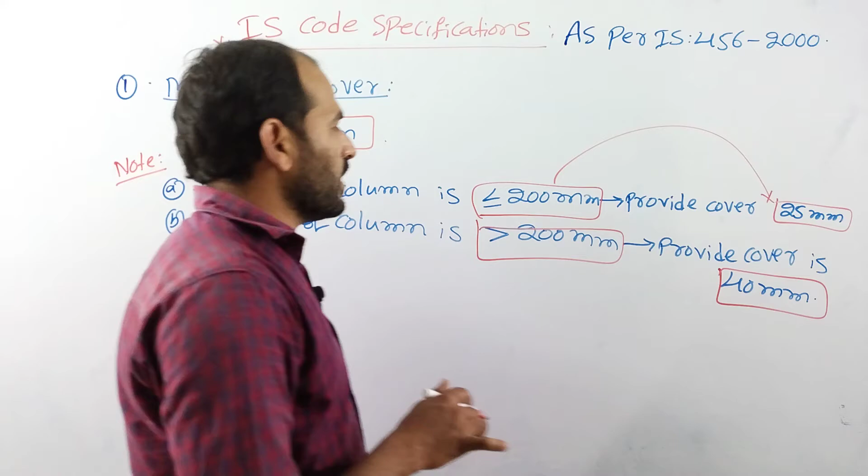Next one is minimum steel. So IS code specification, minimum cover is 40 mm for columns. So next one is minimum steel.

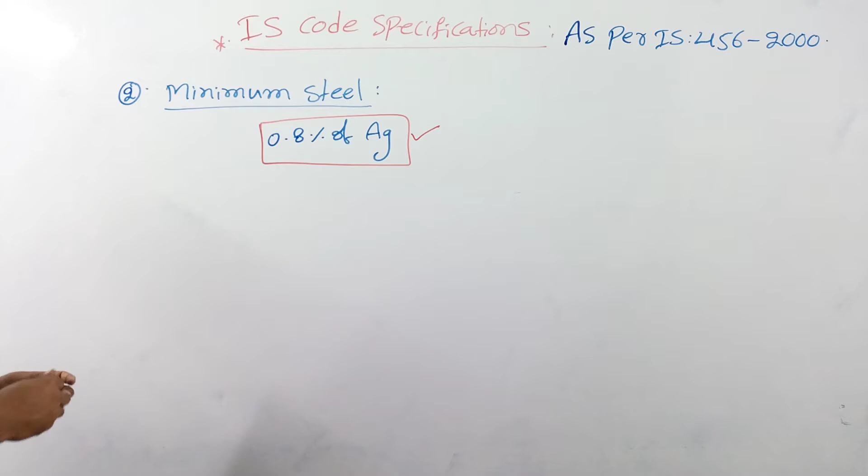So next one is maximum steel. This maximum steel is provided, that is should not be more than 6% of gross cross sectional area.

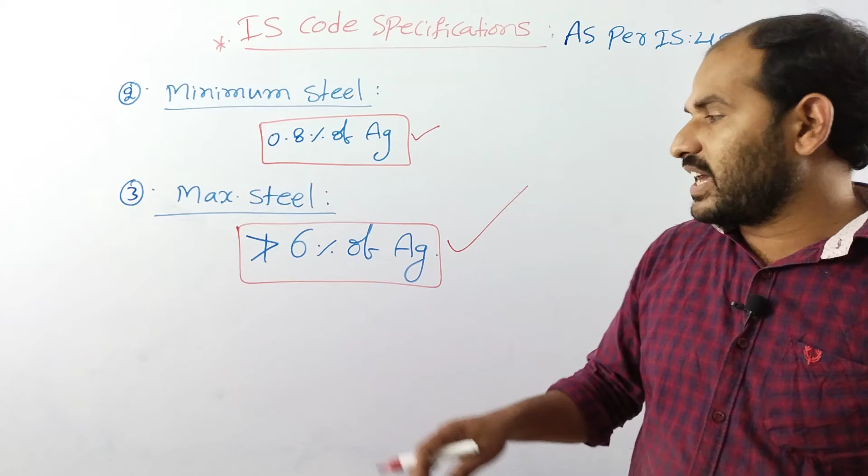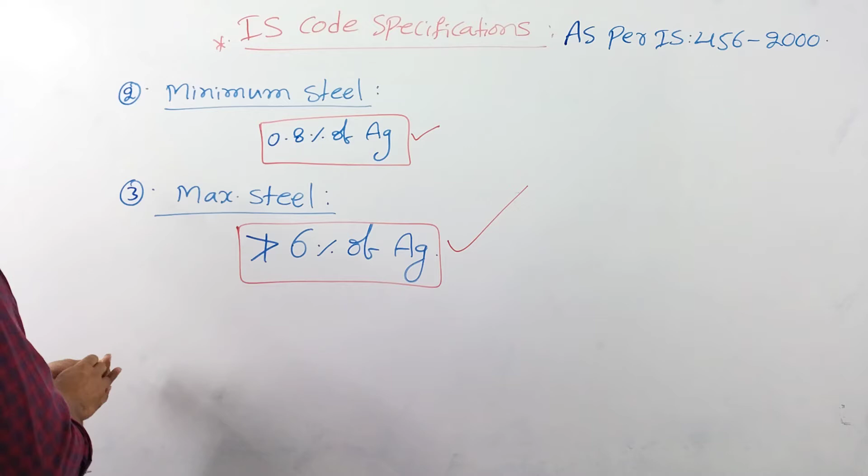So this is maximum steel. And minimum diameter of the bar enta. Next, fourth one is minimum diameter of the bar.

Minimum diameter of the bar, minimum diameter of the bar. Minimum diameter of the bar is 12 mm is the minimum diameter of the bar provided in the column is 12 mm.

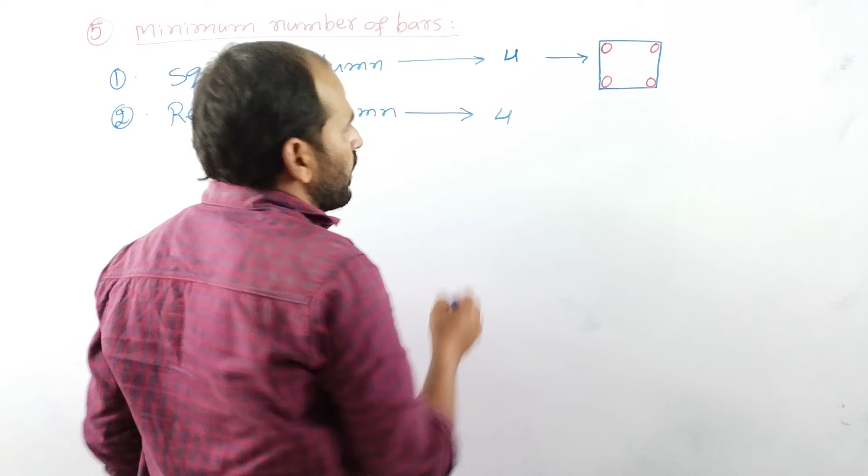Second one is rectangular. For rectangular column minimum number of bars how much? 4 minimum number of bars in a rectangular column. Rectangular ila kuda untundi kada. Minimum number of bars here 1 and 2, 3 and 4. Here also same, 1 2 3 4. So minimum number of bars for rectangular column is 4.

Next one is for circular column.

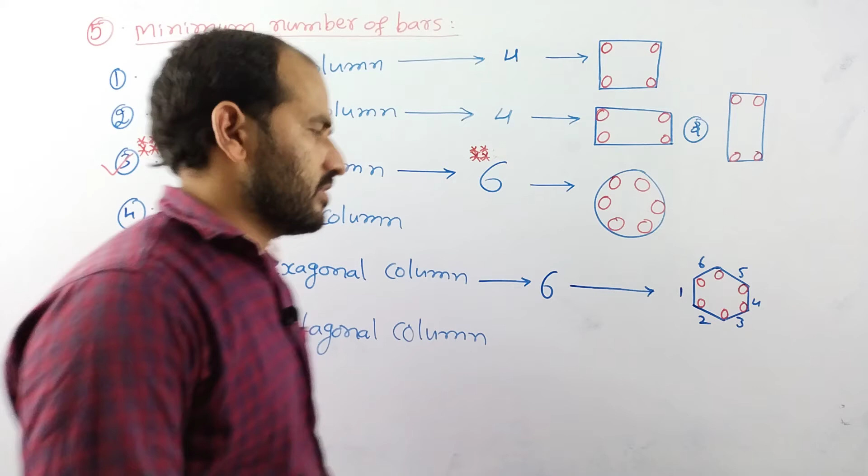How? We will see now.

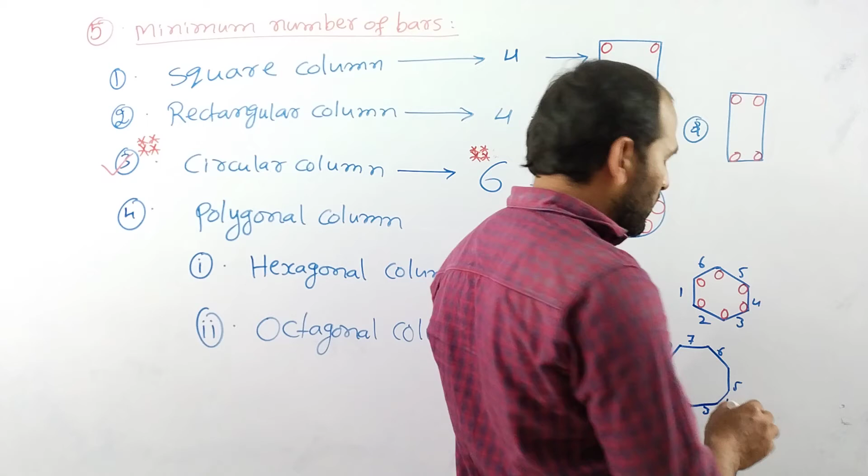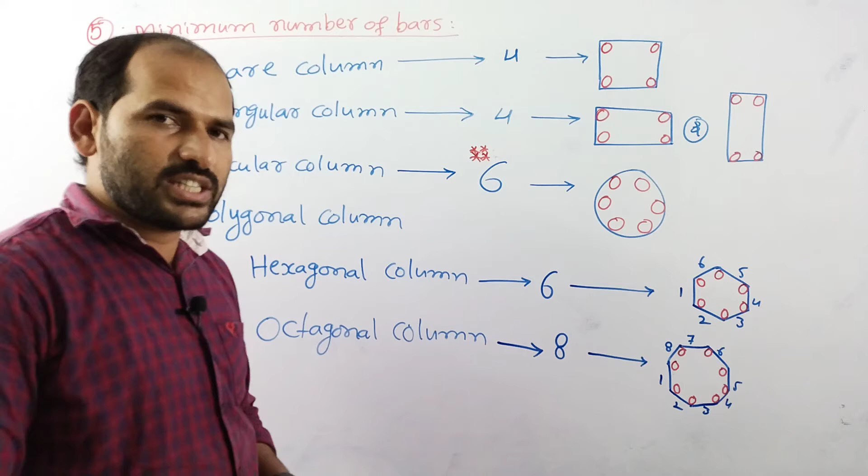So octagonal, 1 side, 2, this is 3, this is 4, this is 5, this is 6 and this is 7, this is 8. So octagonal number of sides is 8 and minimum number of bars is 1 2 3 4 5 6 7 8. So 8 bars, minimum number of bars in octagonal column is 8. Sides also 8. Minimum number of bars in hexagonal column, 6 sides, 6 minimum number of bars. So these are the minimum number of bars.

Next one is minimum eccentricity, enta provide cheyali.

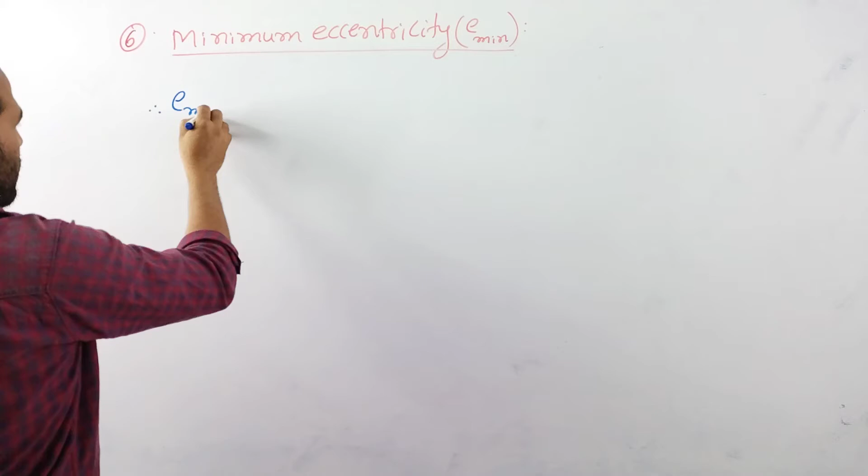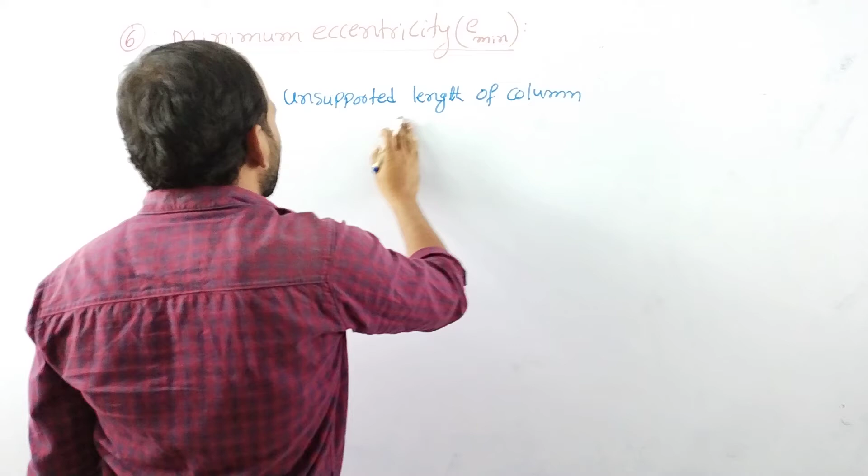Minimum eccentricity, E minimum. So minimum eccentricity E minimum is equal to unsupported length of the column, unsupported length of a column.

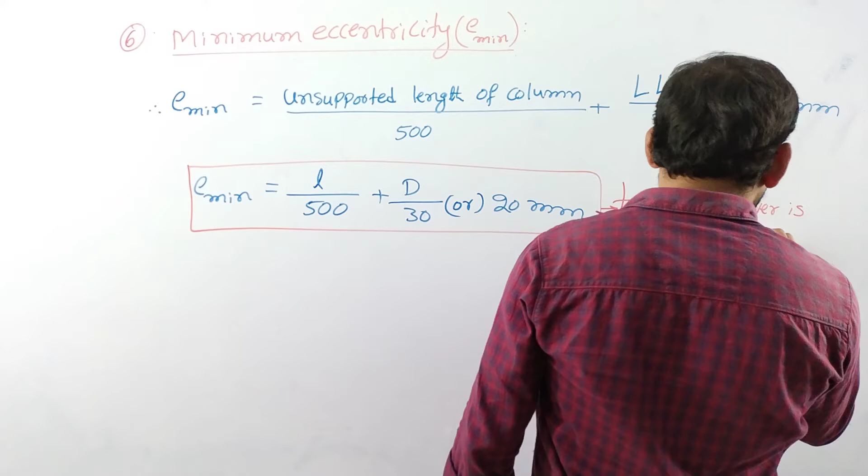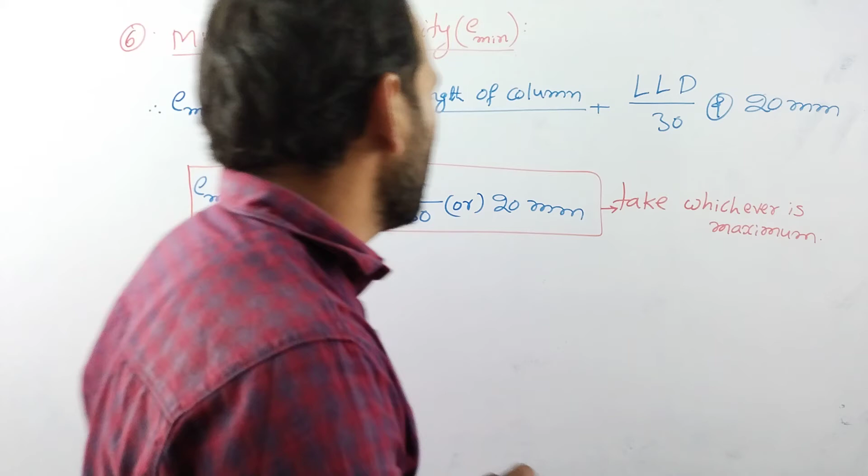So unsupported length of the column, that is L upon 500, plus least lateral dimension upon 30, or 20 mm, whichever is maximum. So E minimum is equal to unsupported length of the column upon 500 plus least lateral dimension of the column upon 30, or 20 mm, whichever is maximum. So take whichever is maximum.

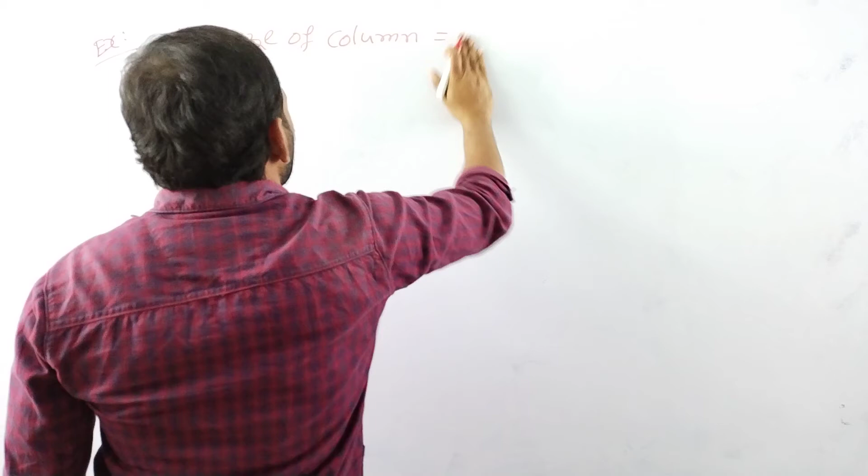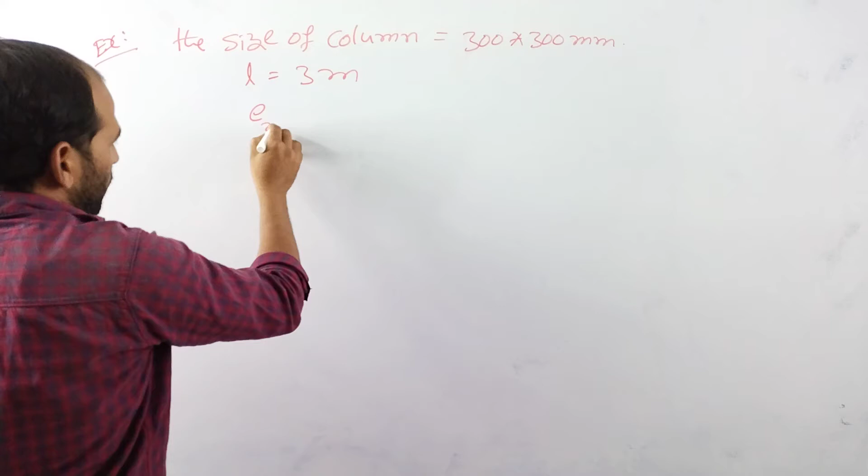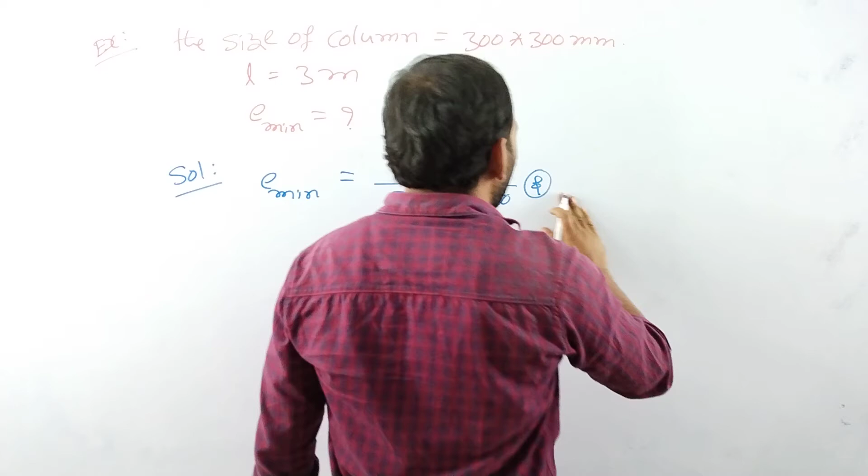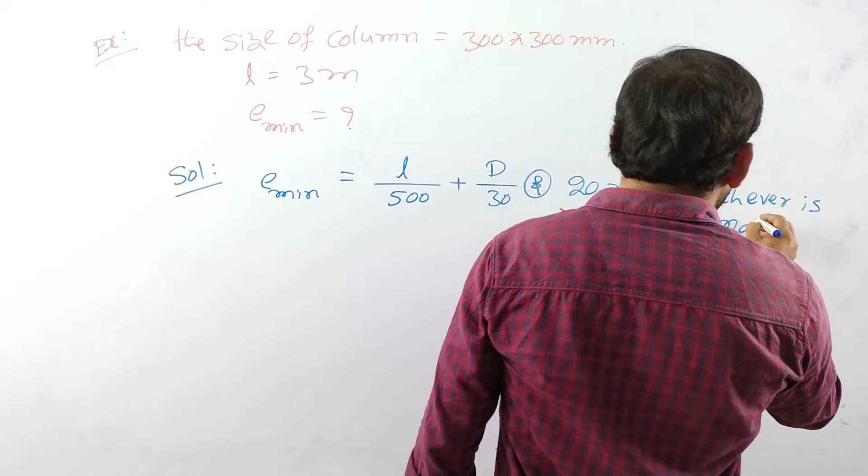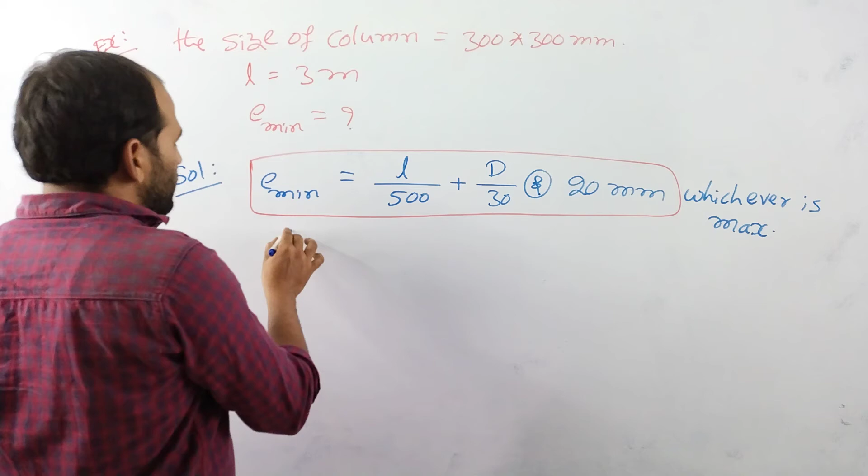Alright, so for this question the solution is: E minimum is equal to effective length of the column, that is unsupported length of the column, upon 500, plus least lateral dimension upon 30, or 20 mm, whichever is maximum. This is the formula.

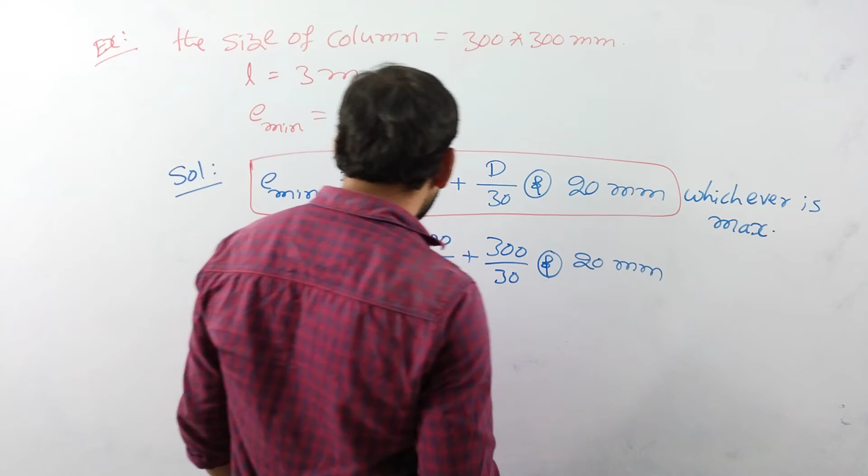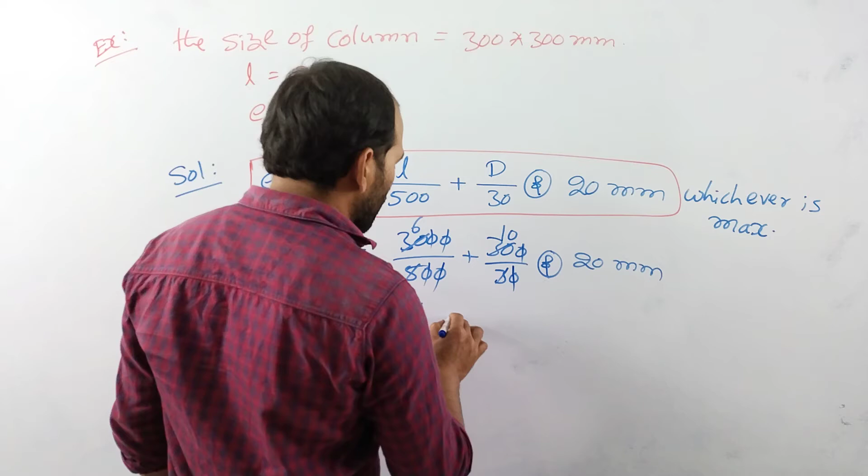So in this formula, substitute the values: L is 3 meters, that is 3000 mm, upon 500, plus least lateral dimension is 300 upon 30, or 20 mm. Here two zeros cancel giving 6, and here this gives 10. So 6 plus 10 is 16 mm, or 20 mm.

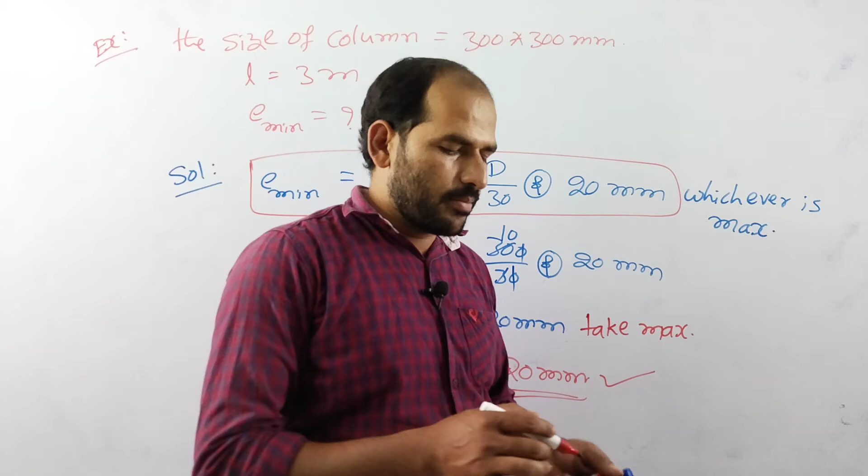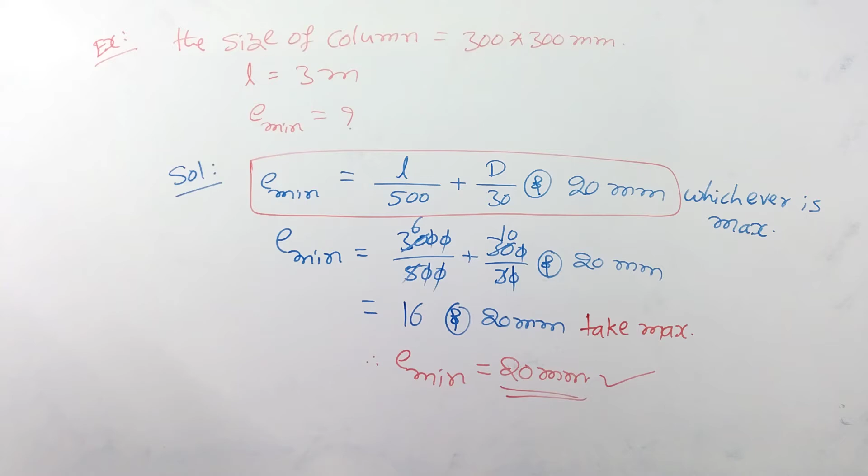But here we take the maximum value among these. Therefore, E minimum is equal to 20 mm. So 20 mm is the minimum eccentricity of the column. This is about the size of the column and the minimum eccentricity. The minimum eccentricity of the column is 20 mm.

Alright, so next one is load carrying capacity of column. Next our discussion is load carrying capacity of a column. If you take a tied column, for a tied column, the load resisting capacity, load carrying capacity.

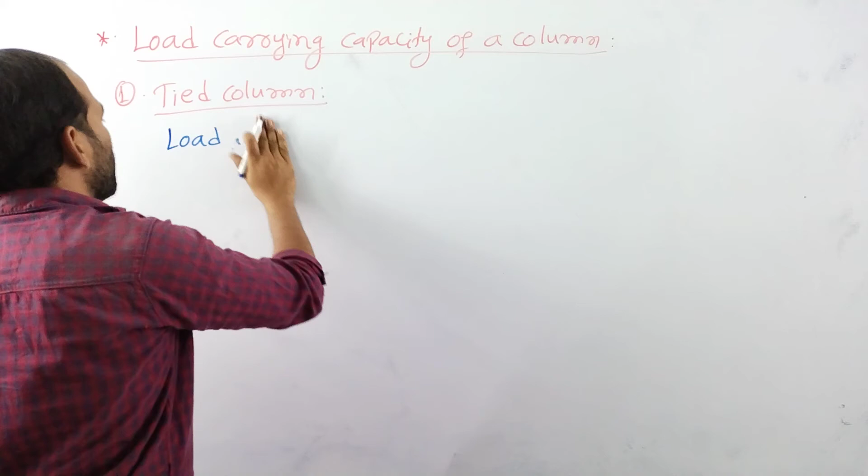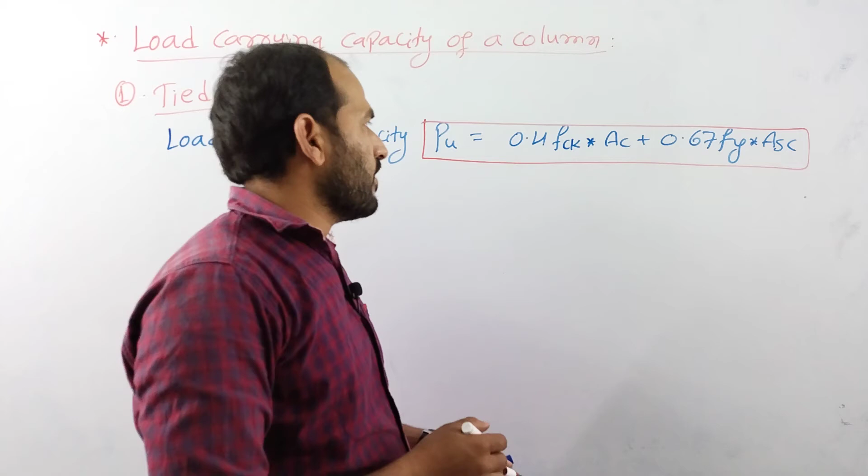So load carrying capacity of the column, that is Pu, is equal to 0.4 times FCK into AC plus 0.67 times Fy into ASC. This is the load carrying capacity of a tied column.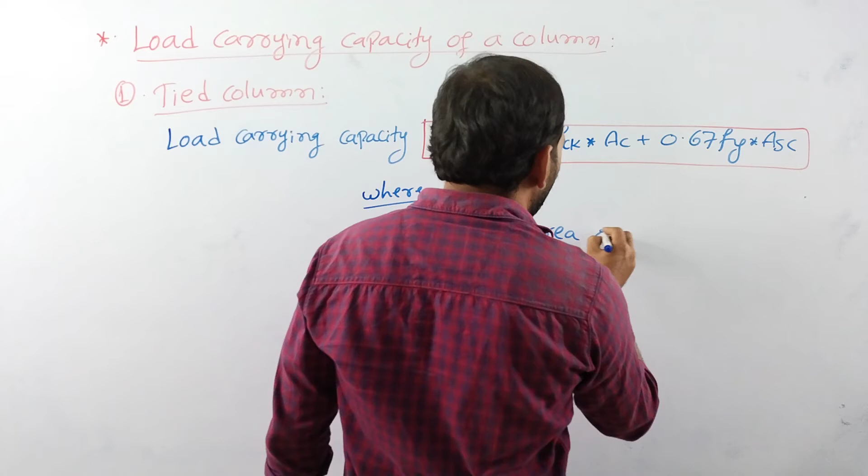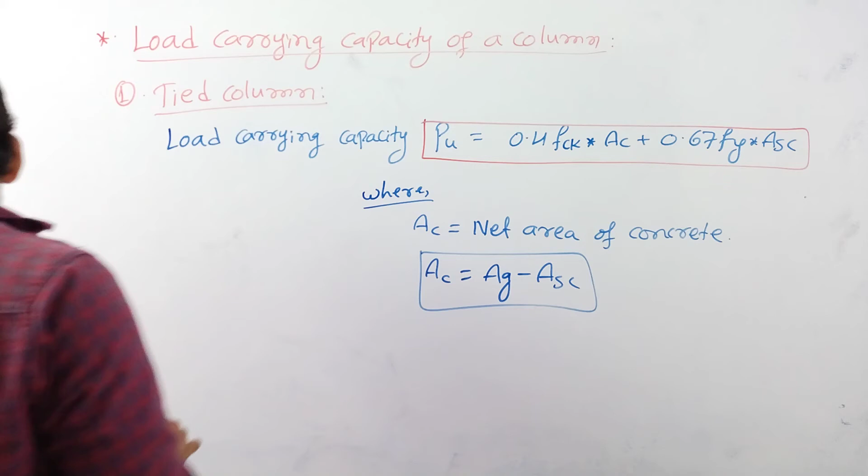So where AC is equal to net area of concrete, and AC is equal to AG minus ASC, where AG is equal to gross cross sectional area of column.

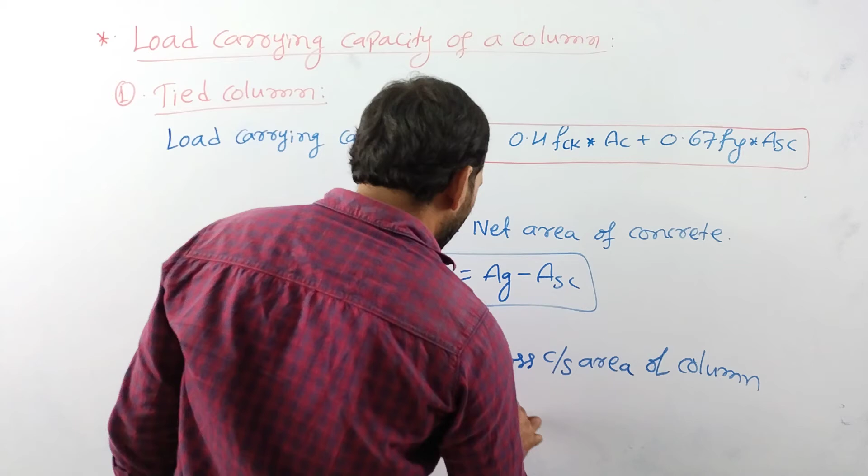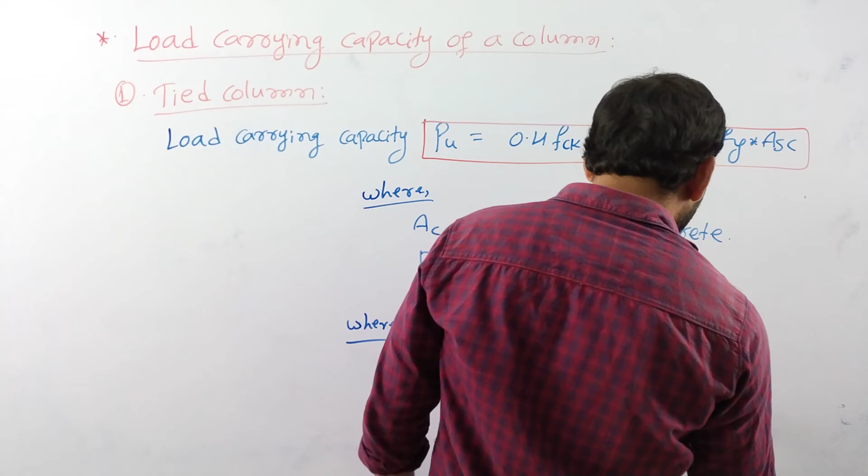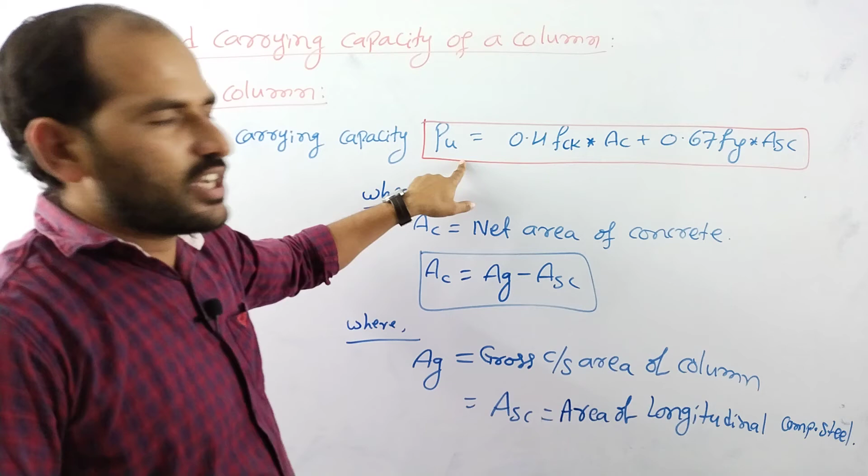And ASC is equal to area of longitudinal compression steel. So load carrying capacity of a column, if you consider the tied column, Pu is equal to 0.4 times FCK into AC plus 0.67 times Fy into ASC.

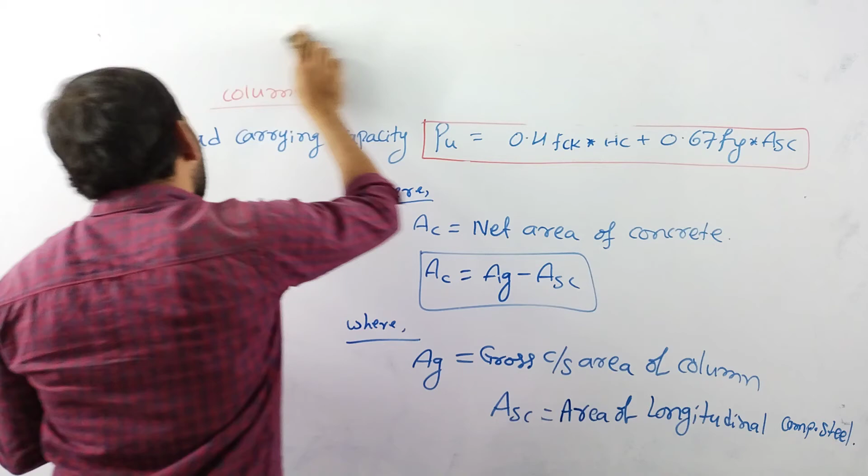Remember, this is the load carrying capacity of a column if you consider it as a tied column. Alright, so next one is a helically reinforced column. This was the formula for a tied column, but what about the load carrying capacity of a helically reinforced column? How do we find that out?

What is the formula for determination of load carrying capacity of a helically reinforced column? Right, so the second one is load carrying capacity of a helically reinforced or spirally reinforced column.

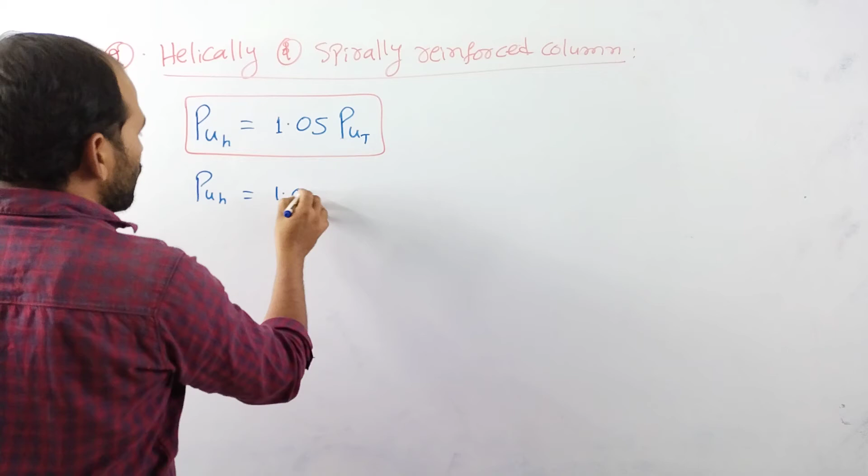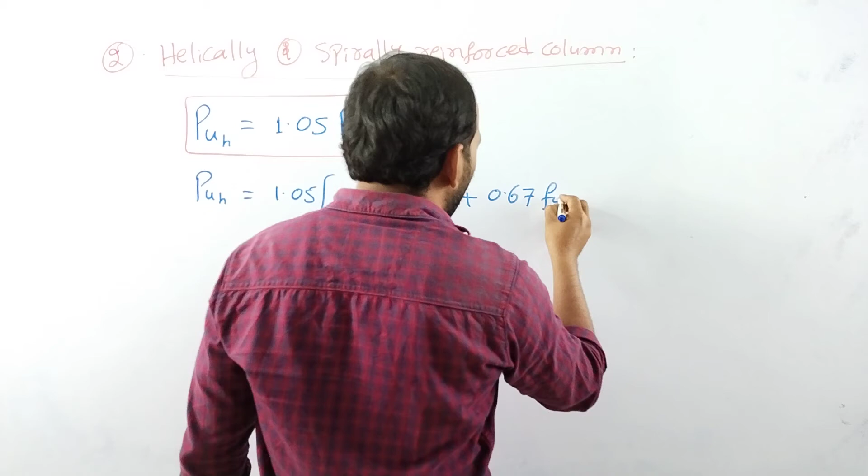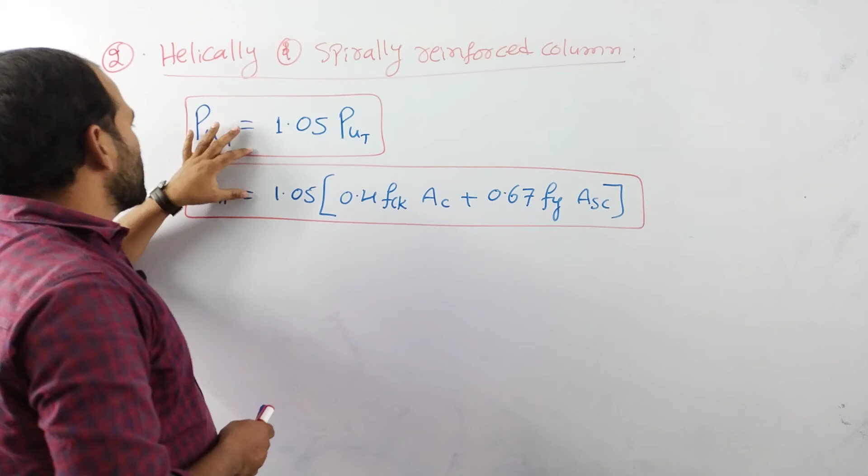So PUH is equal to 1.05 times of 0.4 times of FCK into AC plus 0.67 times of FY ASC. This is the load carrying capacity of a helically reinforced column or spiral column.

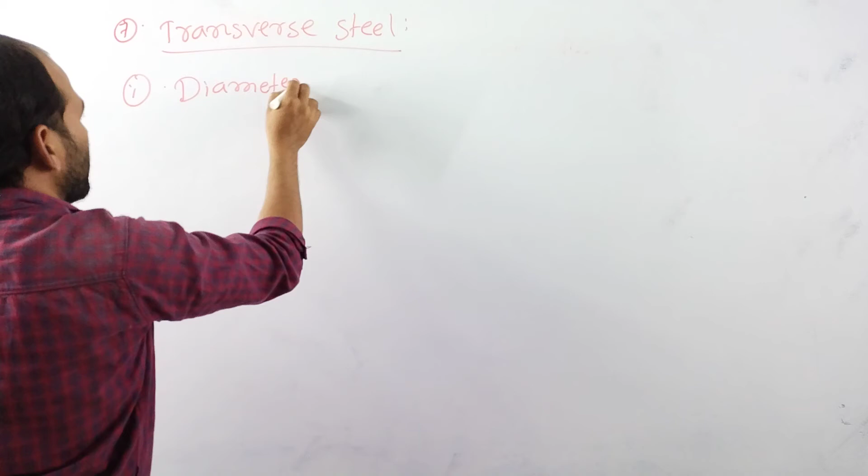Next, for the transverse steel based on IS 456-2000, we need to determine the diameter and pitch of the transverse steel. If you take a diameter, what is the diameter of this transverse steel?

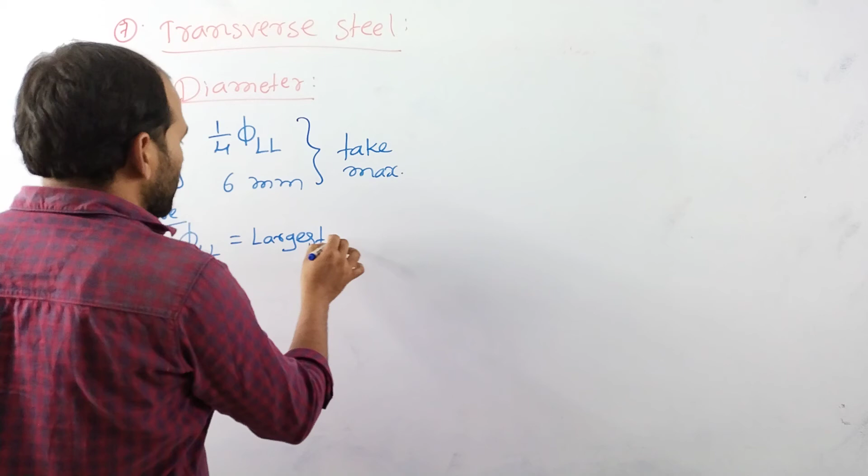Number one option is 1/4 times of the diameter of the largest longitudinal bar, and the second option is 6 mm. Take whichever is maximum among these two, where phi LL is equal to the diameter of the largest longitudinal bar.

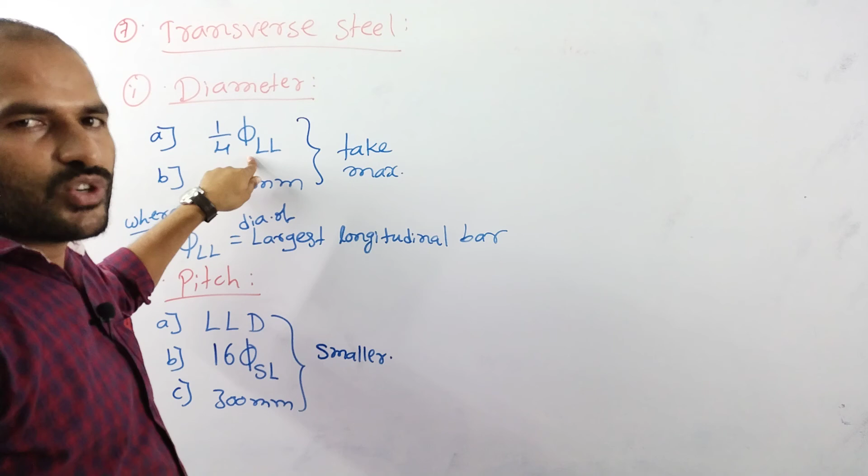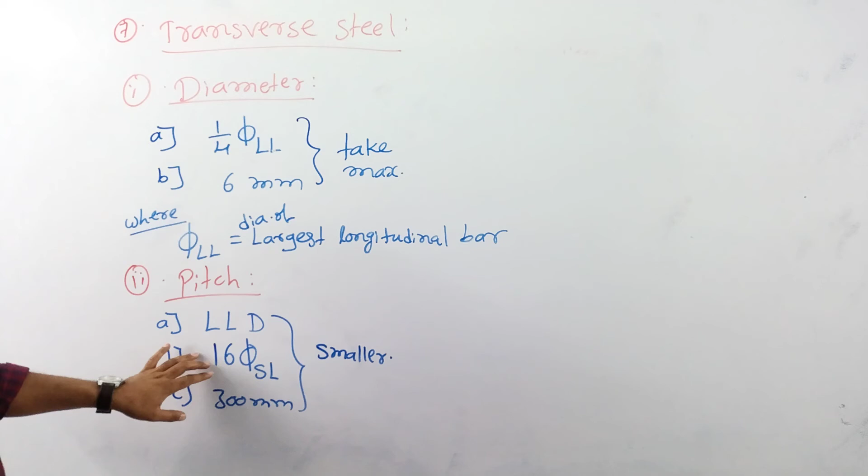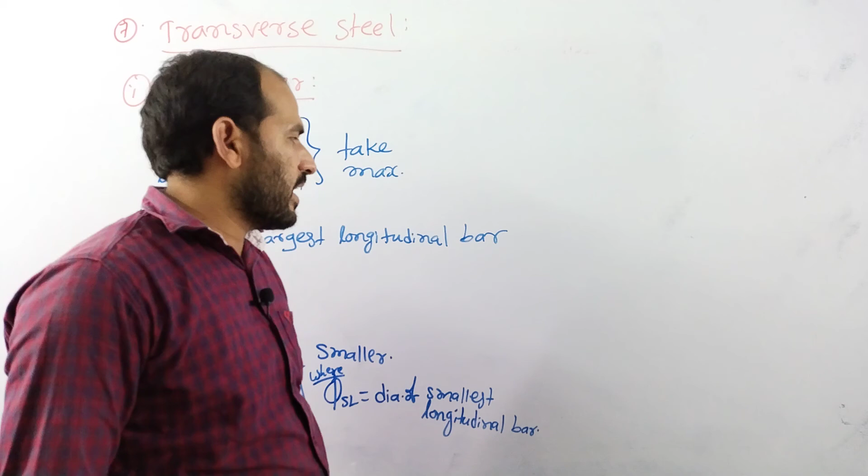So take whichever is smaller, where phi SL is equal to diameter of smallest longitudinal bar. So this is in the transverse steel, the diameter and the pitch specifications.

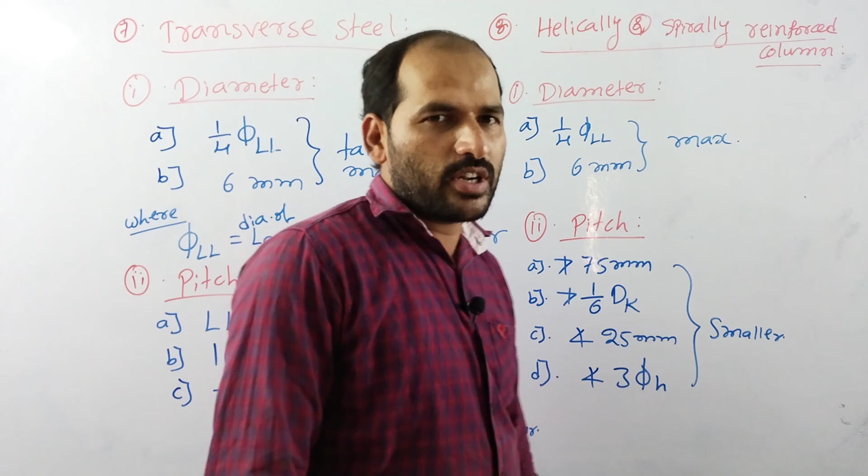If you take a helically reinforced column or spiral column, the diameter of the transverse steel is the same as before. Here also take 1/4 times of diameter of largest longitudinal bar or 6 mm, take whichever is maximum.

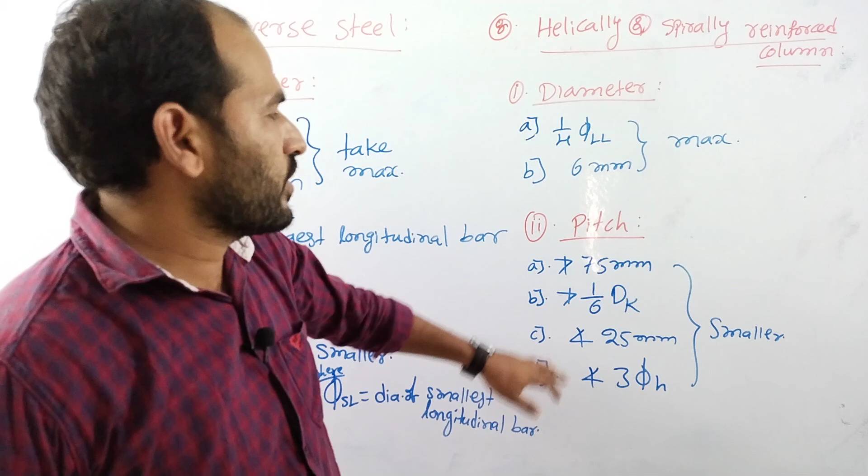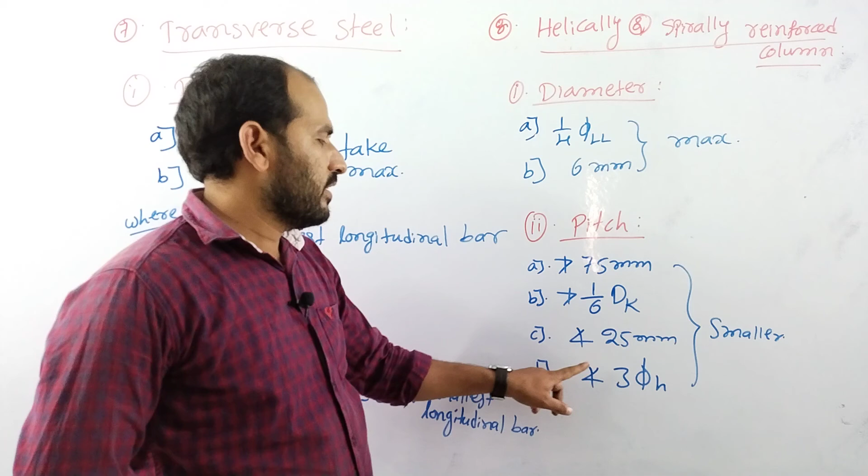If you take the pitch in a helically reinforced column, it should not be more than 75 mm, or not more than 1/6 times the diameter of the core, or not less than 25 mm, or not less than 3 times the diameter of the helical reinforcement. Among these 4 values, take the smallest value as the pitch.

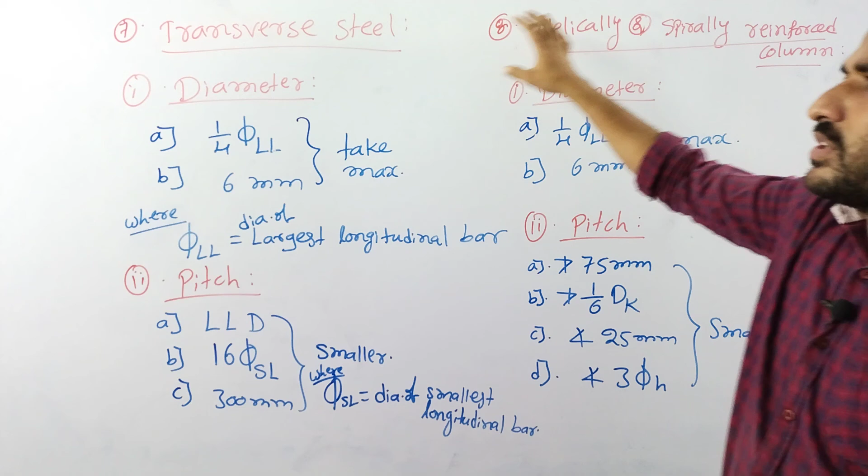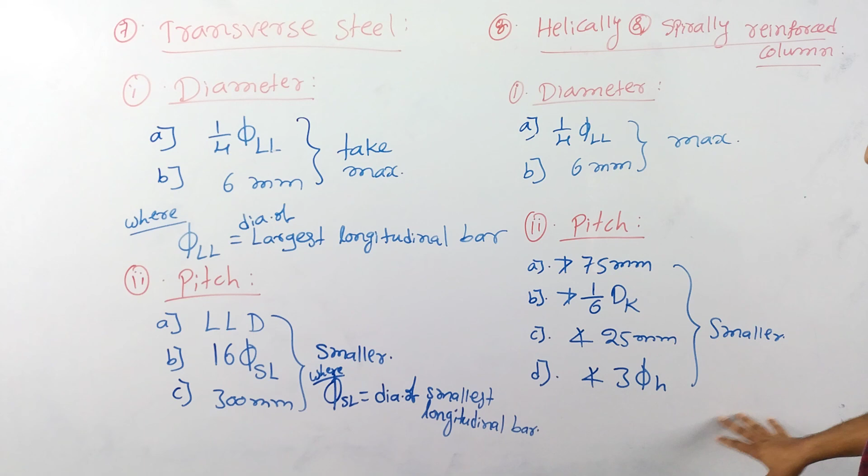So this is about the IS code specification values for columns - the transverse steel and the helically reinforced column. The diameter is 1/4 times diameter of largest longitudinal bar or 6 mm, take maximum. For pitch, take the smallest value among the given options.

Where dk is equal to diameter of core, and phi h is equal to diameter of the helically reinforced column. This is about the IS code specification values in the column. Thank you.